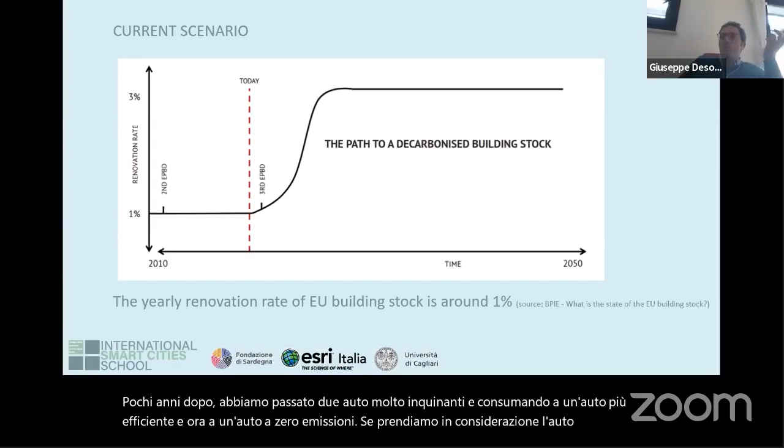It must be said now that working on buildings is very difficult compared to working in other sectors. For example, if we think of the improvements in the car market, it is evident that in few years, few decades, we passed from very polluting and consuming cars to more efficient cars, and now to zero emission cars, if we take into account electric cars. But it's an industrial world, and these industrial schemes are not easy to replicate in the buildings sector.

Another terrific data point is that of this 1% of yearly renovation works, only 5% of that 1%, a very, very small percentage, deals with deep energy renovations. Another fact that is emerging is that we are working on buildings in a very light way. We're not able to implement strong renovation interventions, deep renovation interventions, that are the most effective.

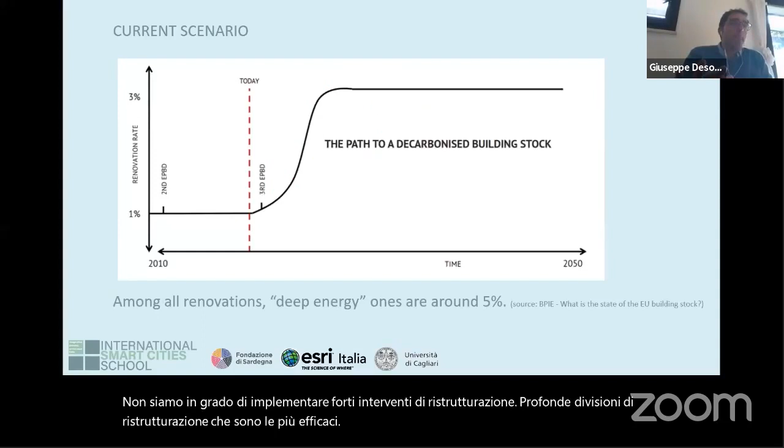Let me give you a quick classification on how we work on buildings at the moment regarding renovation works. The first step is what I call crypto technologies, from Greek, crypto meaning hidden. There is a large share of the market occupied by technologies that make their invisibility a point of strength.

Unluckily, this is also supported by some designers who try to implement energy performance without working on the morphological aspect of the buildings. So there is a tendency to maintain the building as it is and try to apply technologies that improve energy efficiency without modifying the building. It is not possible. It is a share of the market generally occupied by the most ineffective technologies.

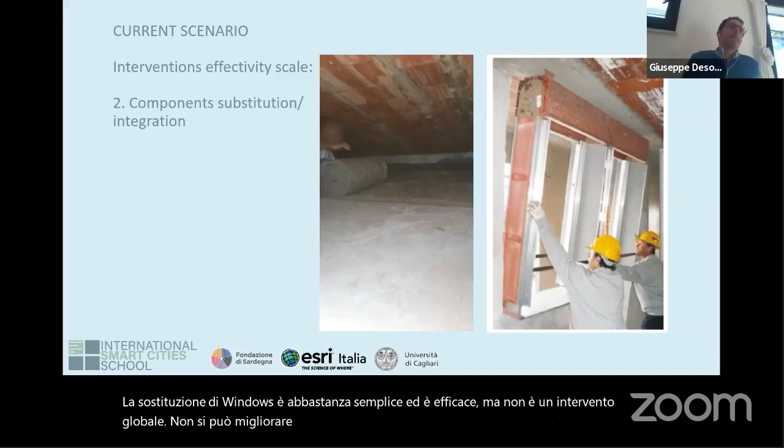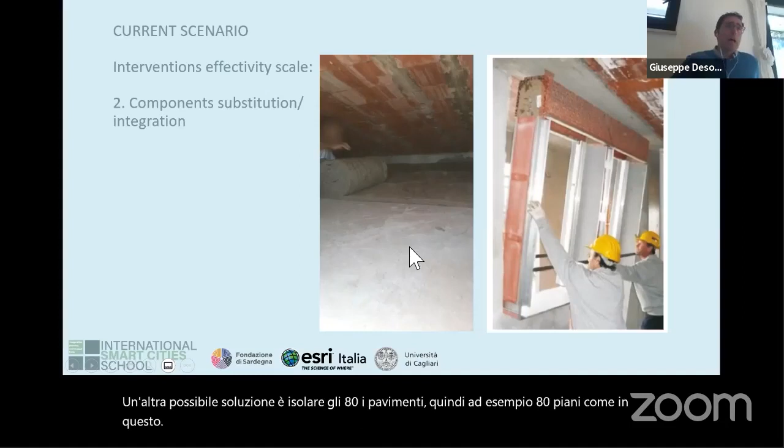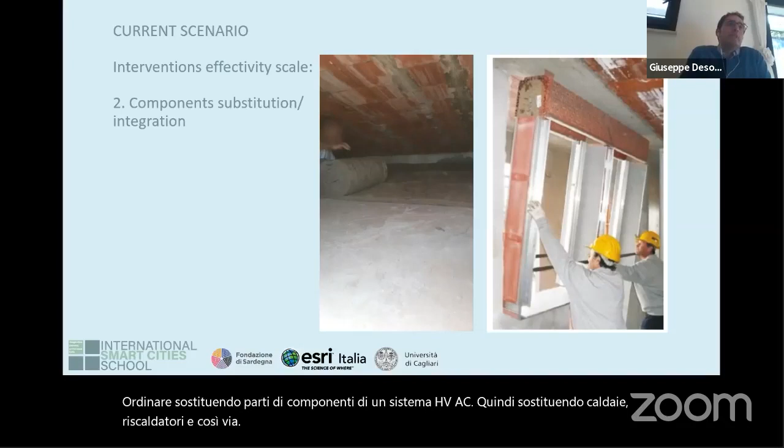Other possible solutions are insulating the floors, for example attic floors, as in these pictures, or substituting components, parts of HVAC systems, so substituting boilers, heaters, and so on. It is the second step, not so performing, but at the moment the most pursued in Italy, but also at the European level.

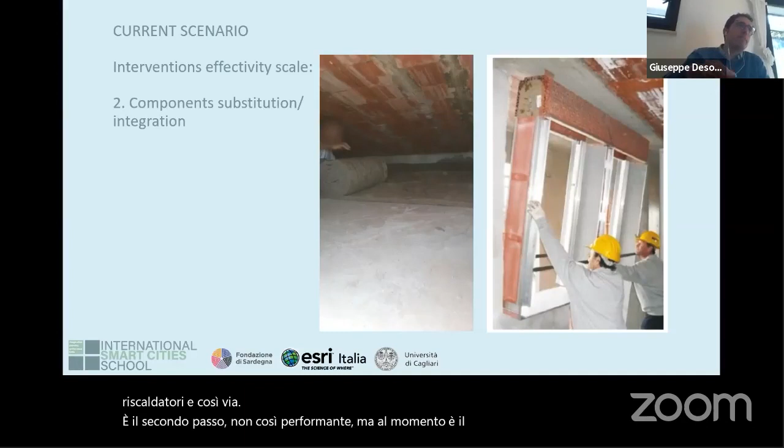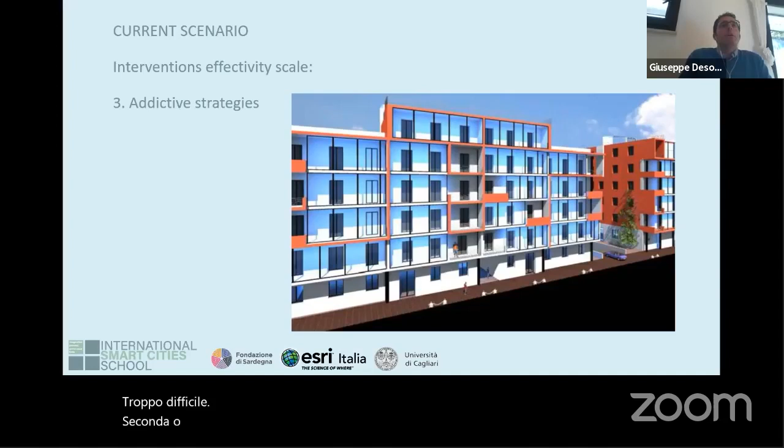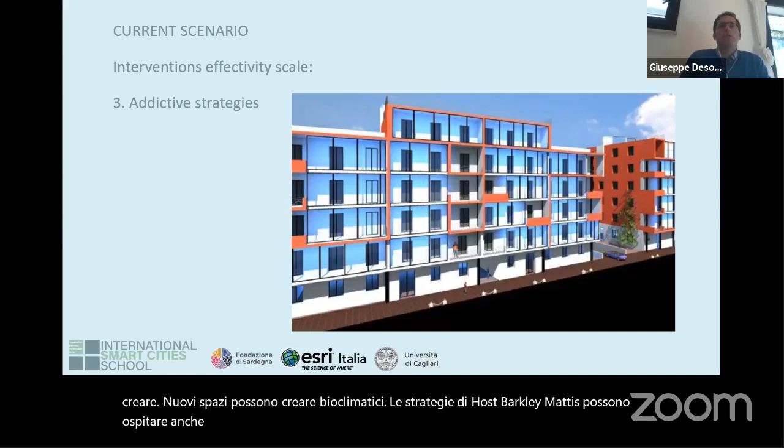A third step is very interesting. It is quite innovative and deals with additive strategies, the strategy of adding a second or a third skin to the buildings that can improve in an important way the energy performance of the building. These additions can create new spaces, can host bioclimatic strategies, and can also host renewable energy devices or efficient energy systems. There is some research at the moment at the European level for these strategies. I think they will be quite promising in the future.

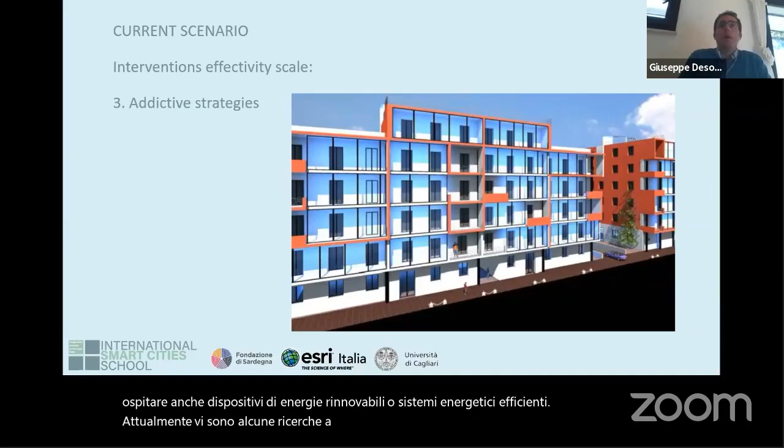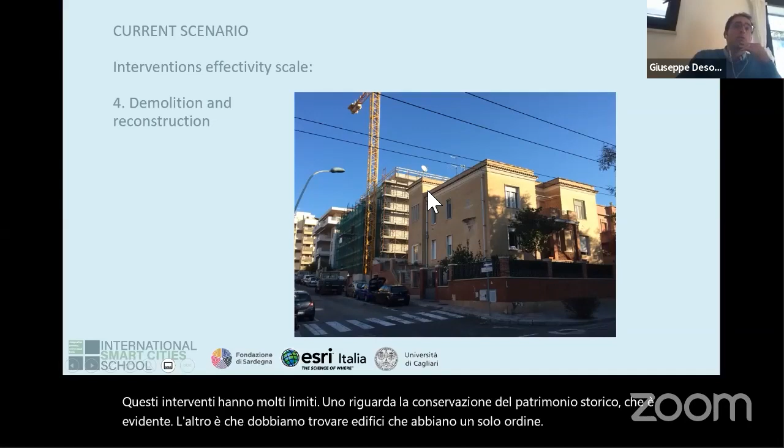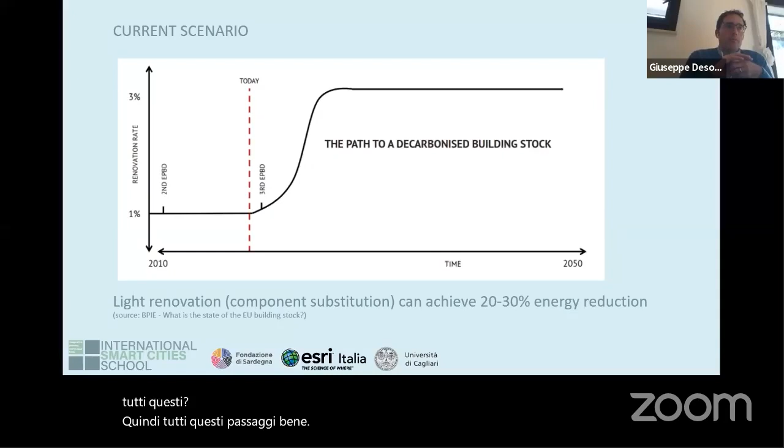These interventions have a lot of limitations. One regards the preservation of historical heritage, which is evident. The other is that we have to find buildings with only one owner, because, as we will see in the next slides, when we have co-owned buildings, everything becomes more difficult. So in terms of energy savings and energy efficiency, what are the differences among all these steps? Well, light renovation, for example component substitution, can achieve a maximum 20-30% energy reduction.

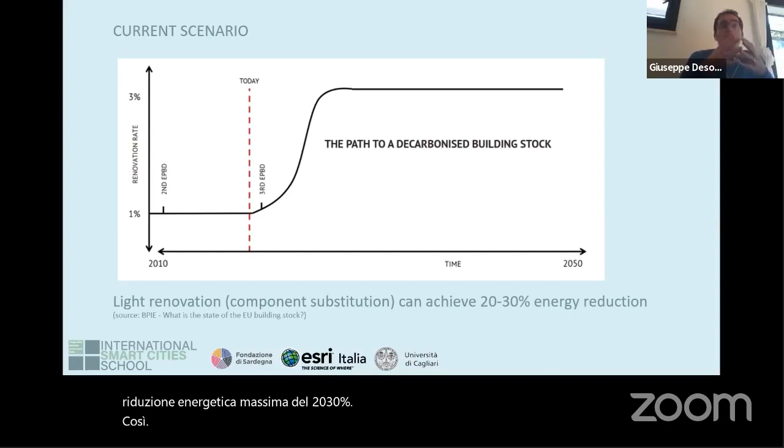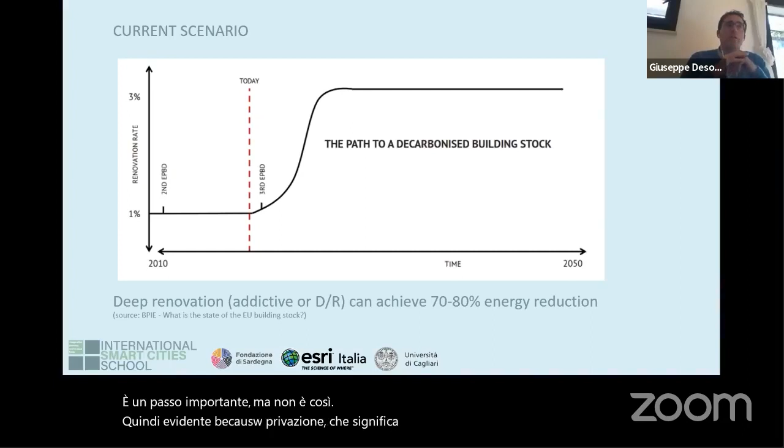So it's an important step, but not so evident, because deep renovation means additive interventions or demolition and reconstruction. This can achieve 70-80% of energy reduction compared to the current status of the buildings. So it is evident that the European Commission is trying to push this kind of intervention—additive interventions, demolition and reconstruction, or substitution of a large part or nearly all building components.

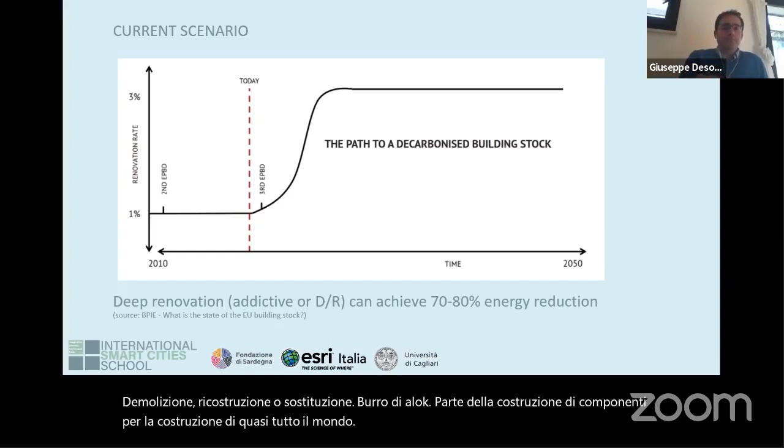Trying to reach these goals, which are the key principles in this new document of the European Commission? Well, the most important is the first: energy efficiency first. Only produce the energy we need. We know that working only on energy production is easier—working on renewable energies is easier than working on energy efficiency of final uses—but it is not sufficient. It is nowadays demonstrated that it's not possible to supply actual energy consumption only with efficient production technologies, like renewable. So we have to work on consumption, on the efficiency of final uses, in this case buildings. It is the most difficult thing to do, but we cannot skip it.

Affordability: sustainable buildings widely available. At the moment, let me say it in a very easy way—performing buildings are for rich people. Saving energy is a luxury at the moment, something that only those with money can afford, because efficient buildings cost more than poor performing buildings. It is evident. We can work on reducing the cost difference between traditional and innovative technologies, but they still cost more. It's also a question of cost distributed over the lifespan of the building. So we have to work on the global cost of the building, and those who can afford more investment now will benefit from lower expenditure in the future. We have to try to make this possibility available to most of the population.

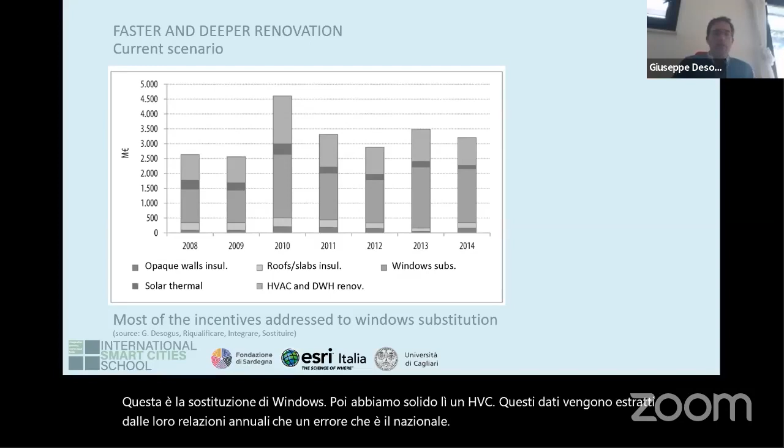These data are extracted from the annual report that ENEA, the Italian National Energy Agency, publishes every year.

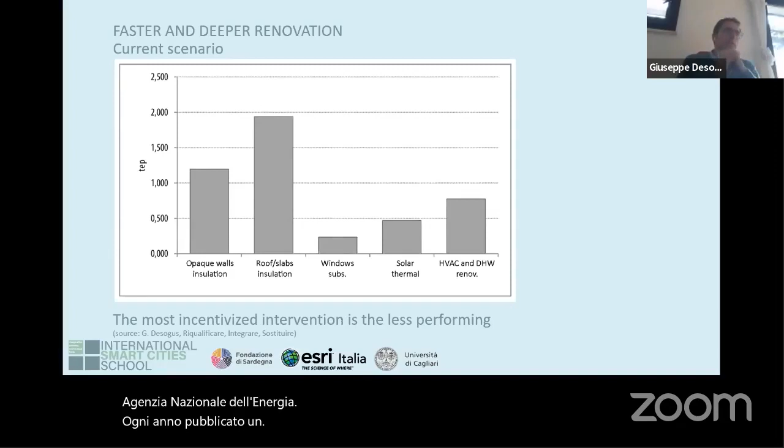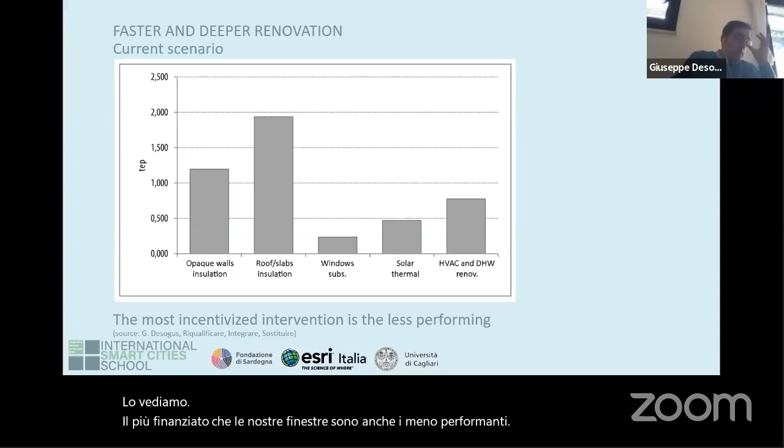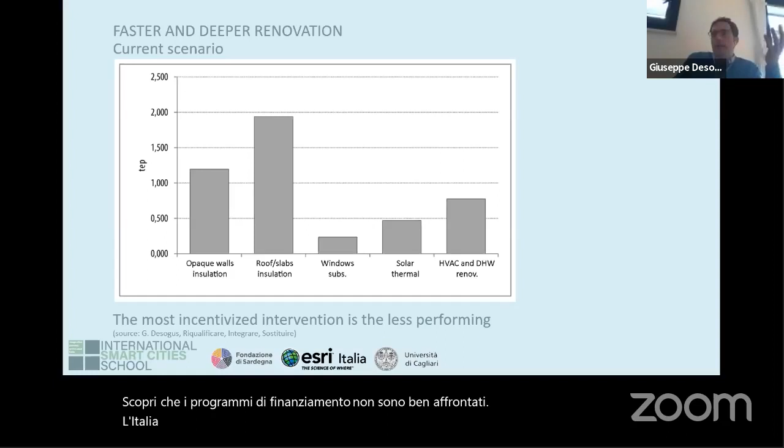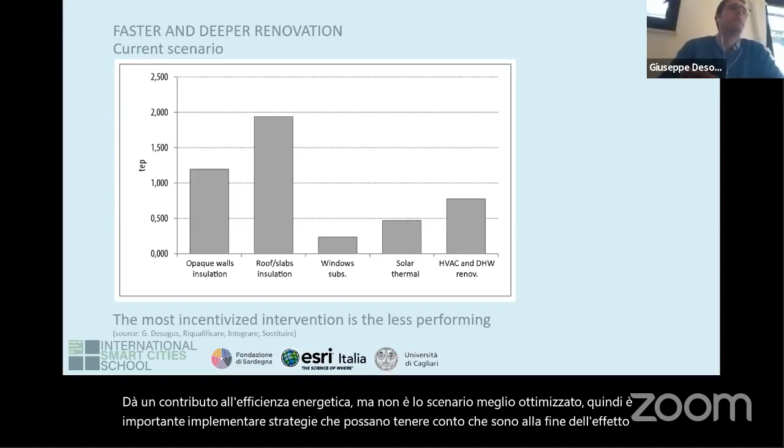If we analyze the energy saving in terms of tons equivalent of petrol according to the same data, we can see that the most financed interventions, which are windows, are also the less performing. So funding schemes are not well addressed. Italy is spending money mainly on substituting private building windows. It gives a contribution to energy efficiency, but it's not the best, the optimized scenario. So it is important to implement strategies that take into account the overall effect of these financial incentives.

Another issue important to consider when we talk about buildings can be summed up by this statement of Lord Kelvin, one of the fathers of classical thermodynamics. He said: if you cannot measure it, you cannot improve it. The question I always ask is, are we sure that we are able to measure buildings? Do we really know our buildings? According to my experience, the answer most of the time is no.

There are two categories of information that are difficult to understand about buildings, in my opinion. The first, which seems very basic but believe me it's not easy, is how the building is built. We really don't know the technologies used to build a building, especially a private building. Public buildings can be better known, but for existing private buildings it's very difficult to identify which kind of walls, which kind of materials for walls, slabs, roofs and so on have been used, because most of the time we don't have a design.

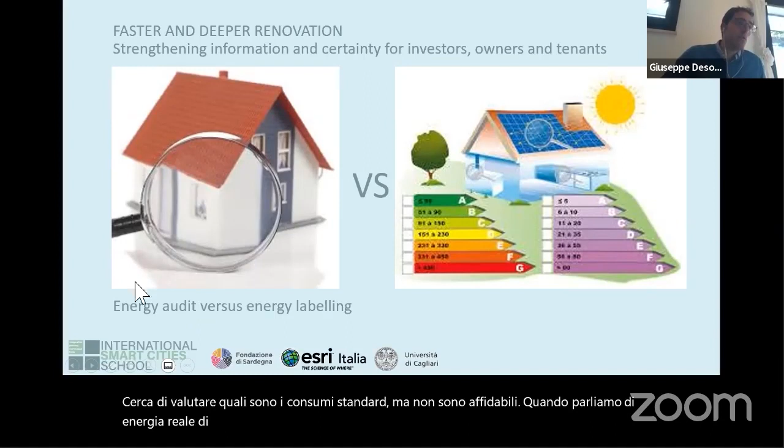So there is quite a big difference between energy audit and energy labeling. Energy labeling can only be used to compare different buildings and to assess their standard consumption, but it's not reliable when we talk about real energy consumption. Energy audit is what we actually need to do on buildings.

Working on big buildings like hospitals, schools, commercial buildings, big public buildings, an energy audit is cost effective. But making an energy audit on small residential buildings, sometimes only on one flat, it's not cost effective, because it needs very expensive and invasive diagnostic technologies that are not compensated by the return, excuse me.

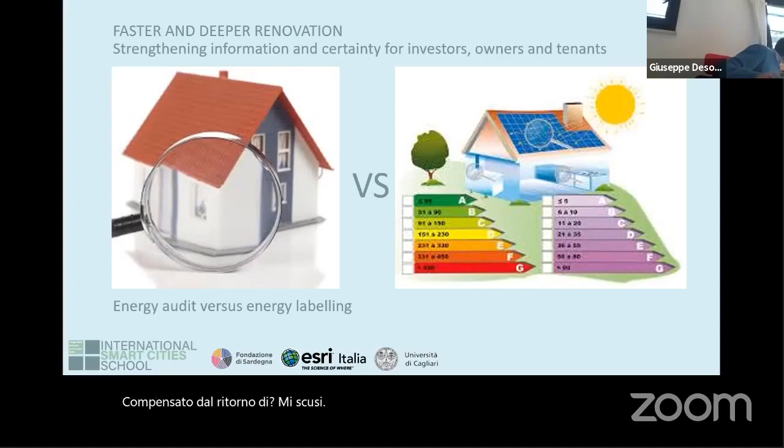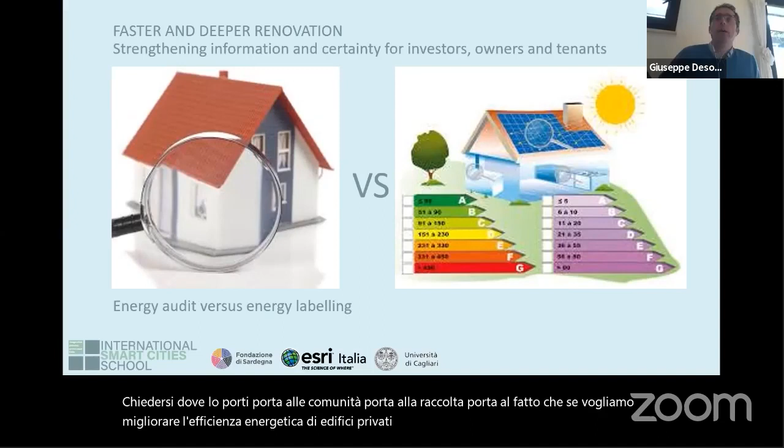Where it brings communities together, it brings gathering, it brings to the fact that if we want to improve energy efficiency of widespread private and residential buildings, we have to gather together and try to implement technology or procedures like energy audits, whose costs can be distributed over a lot of users.

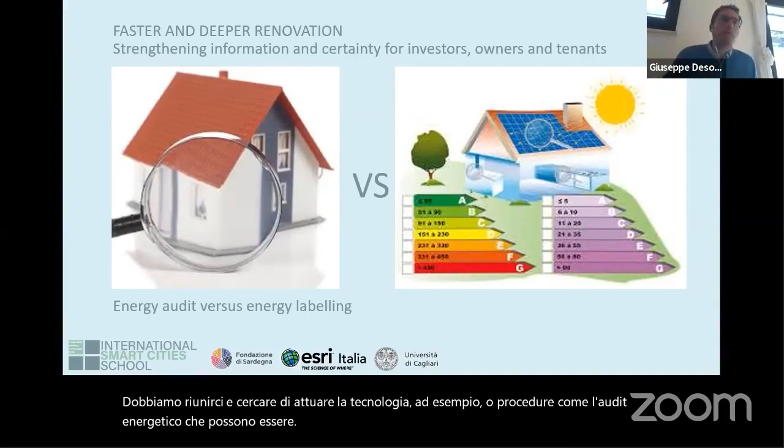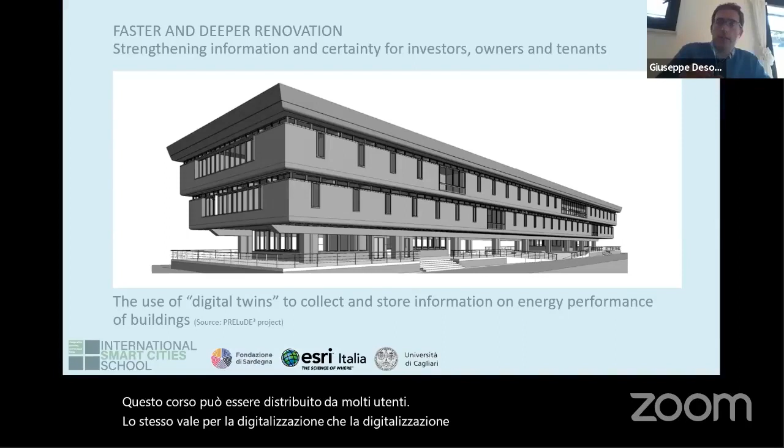The same is true about digitalization. Digitalization can help to make reliable energy audits. But for example, BIM procedures, building information modeling procedures, are again expensive, so it is not possible to use them just for one small home or flat or house.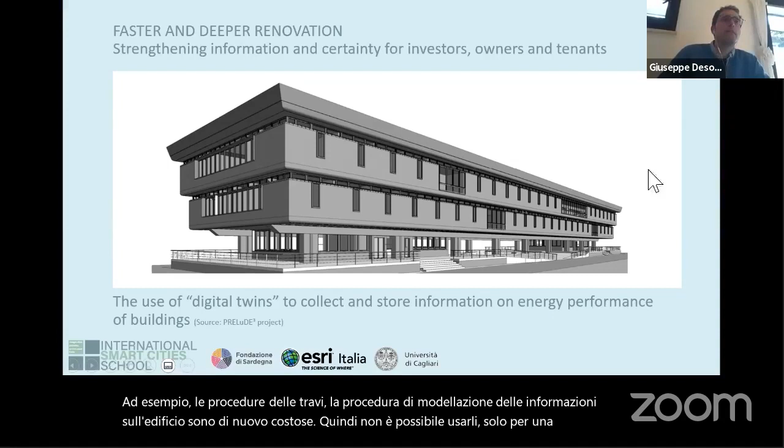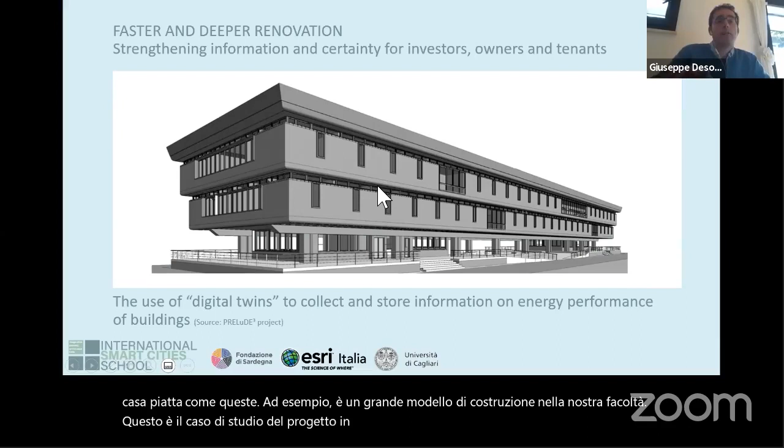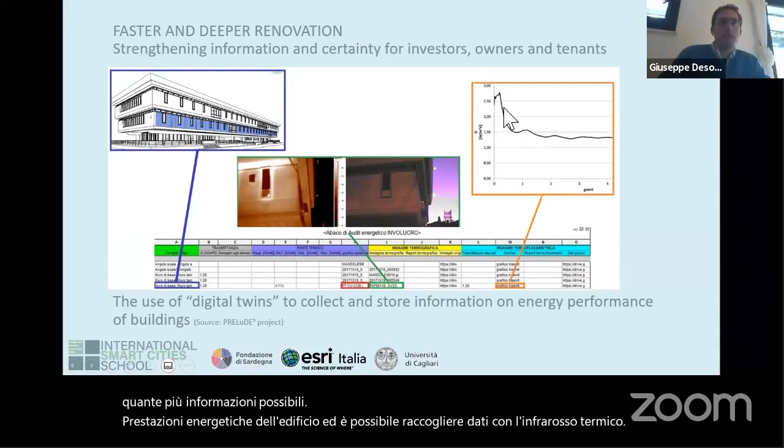This, for example, is a BIM model of a building in our faculty that is the case study of a project called Prelude. We're trying to use building information modeling to collect as much information as possible regarding the energy performance of a building. It is possible to collect data with infrared thermography, with heat flux meter measurements, and also it's possible to connect sensors, so building automation, with building information modeling of the building. But it cannot be done for a single flat.

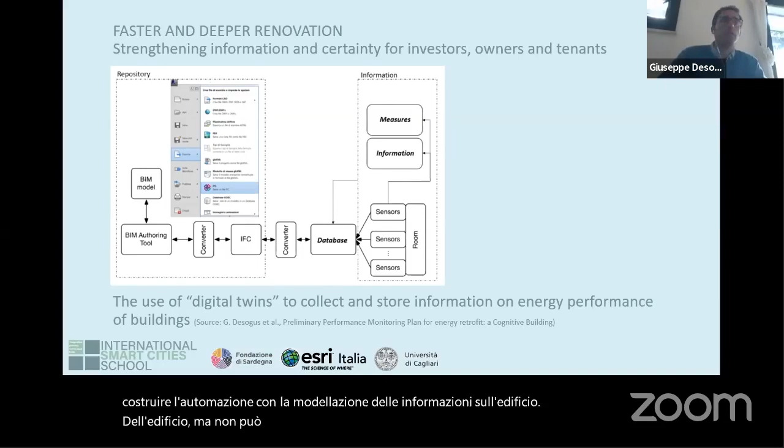So it is important to create, as we will say in the following, energy efficiency communities.

Give me just one second again. I hope this is the last interruption. Okay.

Knowledge. Then let's try to find an instrument to improve renovation. Well, renovation has a cost, sometimes it's quite expensive. How can we help people sustain the cost?

Well, the first scheme, the first idea that came up at European level was to implement what is called third-party financing. So involve a third party that is not the owner or the final user of the building, but someone, a company, maybe a bank, that is interested in investing in energy efficiency. The basic assumption on which third-party financing works is that consumption before is higher than consumption afterwards, so there is a real energy reduction.

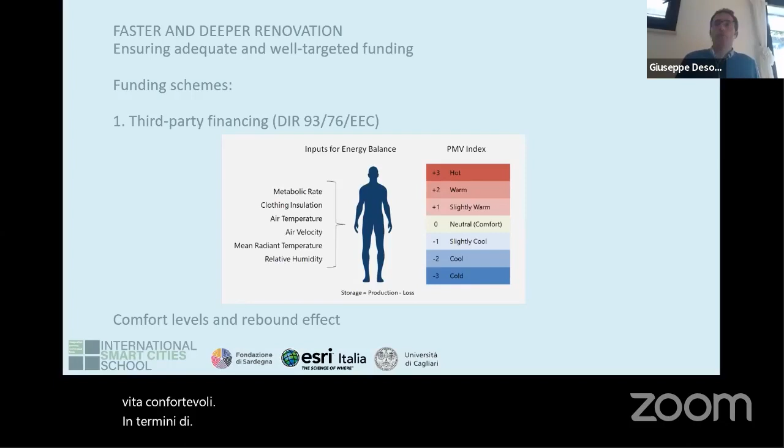On buildings, we use energy for what? We use energy for giving people comfortable conditions of life in terms of thermal condition, visual condition, acoustic condition, quality of air, and so on.

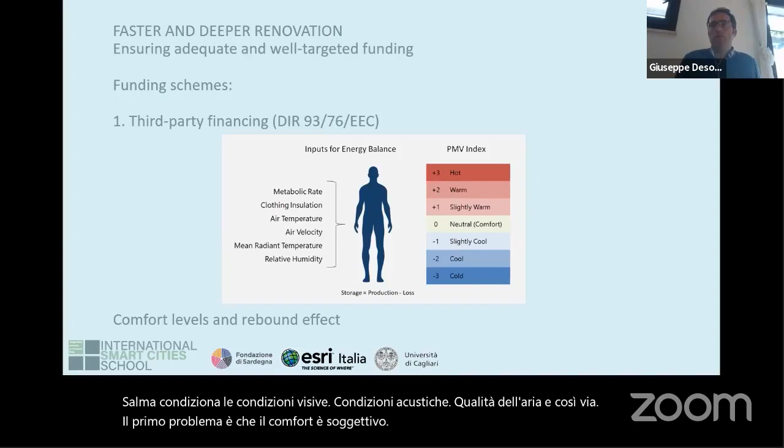The first issue is that comfort is subjective. We can talk about comfort only on a statistical basis. So involving a lot of interventions and a lot of people, we have the possibility to be statistically sure of comfort improvement, for example. But at single building level, it's not easy to understand if comfort is perceived, because it depends on a few people, and the perception of thermal condition, for example, is different from person to person.

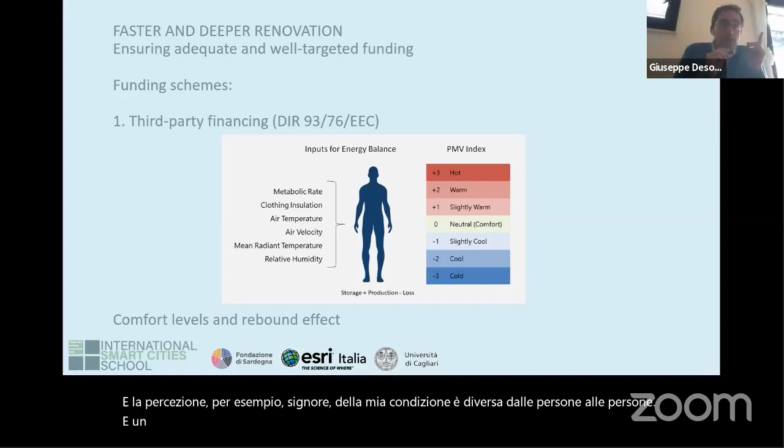Another important aspect is that if comfort is not met before the works, the first result of the works will be reaching comfort condition, not consuming less energy. Because if people can afford to have comfort conditions, they will tend to spend the same amount of money and energy, but just to improve their condition.

It is good because we're talking about fuel poverty, about low-income people generally, who can now afford to heat or cool the building sufficiently, and that's a good thing. But who wants to invest in other people's comfort benefits? That's the point. Not private parties. Public, yes, but not private.

So when we talk about third-party financing, and we're talking about energy service companies, take into account that if this procedure, this mechanism, is not supplied by public subsidies, it doesn't work.

And then we have the necessity of public incentives. Generally, there are two kinds of incentives, diffused more or less in every European country: on-bill incentives, generally for public bodies, where the government gives cash back to public bodies that invested in energy efficiency; and on-tax incentives, generally for private owners or tenants.

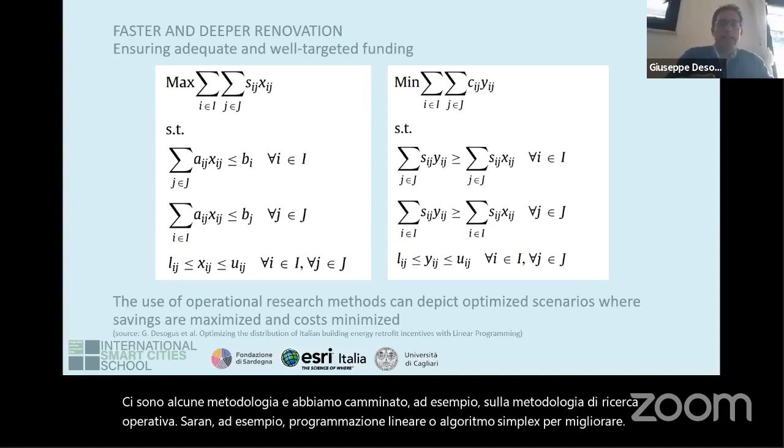There are some methodologies, and we worked, for example, on operational research methodologies, such as linear programming or the simplex algorithm, to improve the incentive scenarios. So incentives cannot be dedicated just to single technologies, but we have to optimize the mixture of technologies, which depends, for example, on geographic and climatic conditions, to reach the best scenarios.

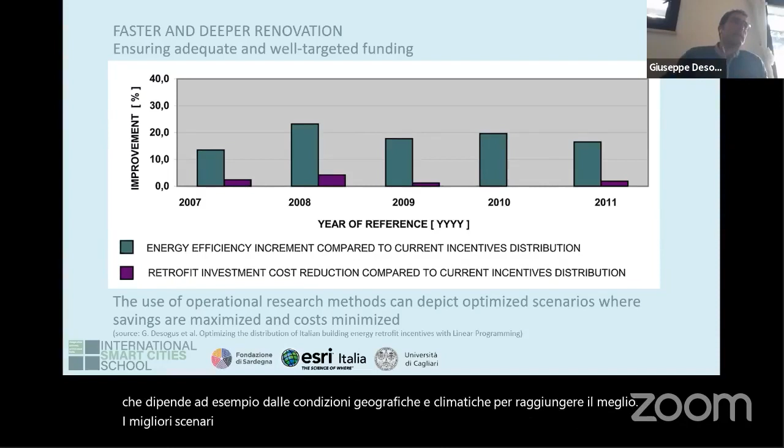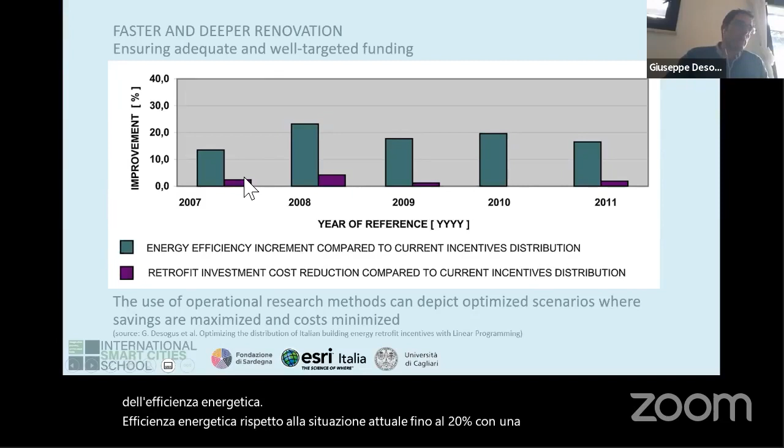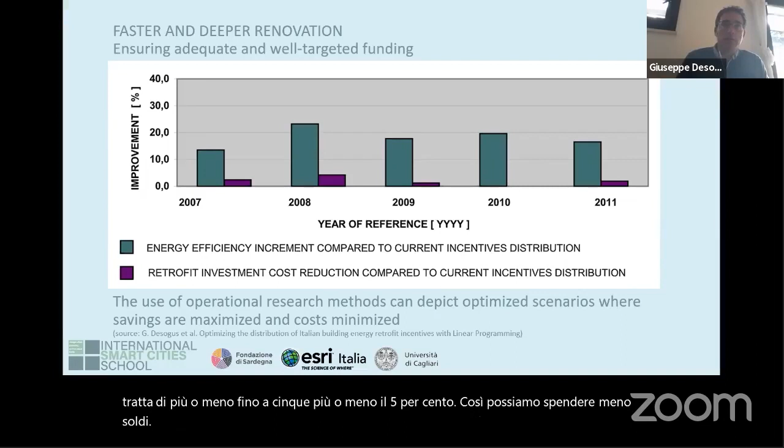We demonstrated, for example, that there can be an increment in energy efficiency compared to the current situation of up to 20%, with a reduction of cost of about 5%. So we can spend less money by pushing those technologies, or that mixture of technologies, that are most effective.

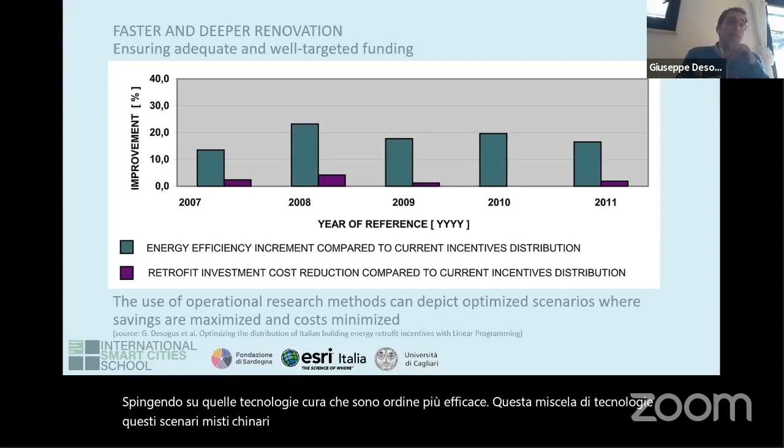This is something that public government should do at the European member state level. It's not easy, but it must be done.

The other problem with on-tax financing is that it's not able to avoid fuel poverty. Low-income people have no money to heat buildings, so they have no money to invest in energy improvement. It's evident, so they must be supplied differently; the government should find a different way to address this target of people.

Another problem is the diffusion, in some EU members especially Spain and Italy, of co-owned buildings, blocks of flats divided into many units. Every owner owns his own flat, a first-class property, and then a share of all the common parts of the building, which are shared by all owners. Let's say that's a B-level property.

But this B-level property, which people don't consider important, includes the technological parts in charge of energy efficiency: facades, roofs. They are common parts, and they are the most important parts of the envelope in terms of energy efficiency.

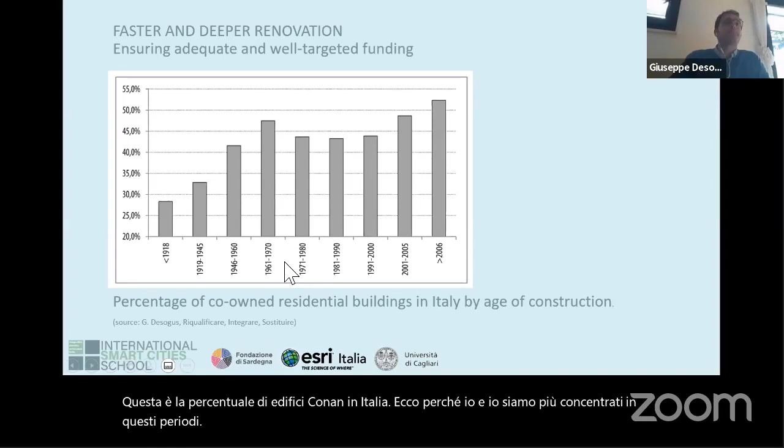It is quite high, most concentrated in the period just after the Second World War, when in Italy there was an urgent need for reconstruction that led to building a lot of multi-property buildings.

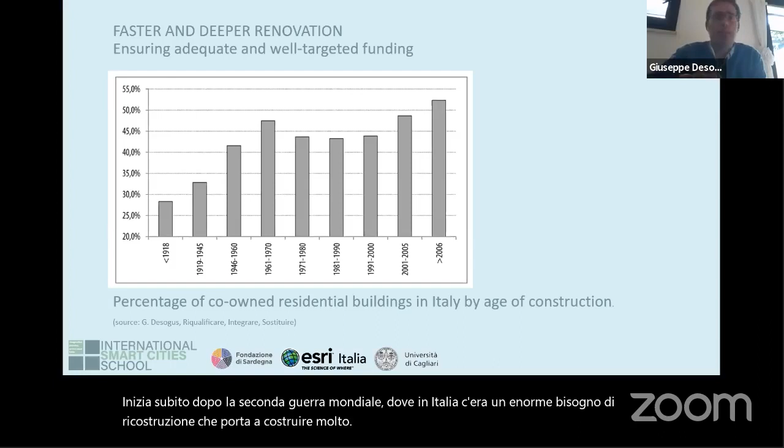So Italy is trying to go beyond the limits imposed by co-owned buildings by increasing the financed quota of intervention up to 110%. They're trying to say: if I give you more money than you invest, maybe intervention on the common parts becomes more interesting.

The other possibility is to transfer the tax credit to a third party, mixing a third-party scheme with a publicly financed scheme—so I have no money to invest, but I can give my tax credit to a third investor. It's very new, it started a few months ago. We will see if it's a good solution or not.

The last issue, also recalled in the European document, is the participatory and neighborhood-based approach, communities. But the European document talks only about energy communities. In my opinion, energy communities are not enough.

If energy communities are only producing, selling, and buying energy for a group of people at a convenient price, they will not contribute to improving energy efficiency of buildings, and above all—this is the first and important issue—to manage and preserve long-term efficiency.

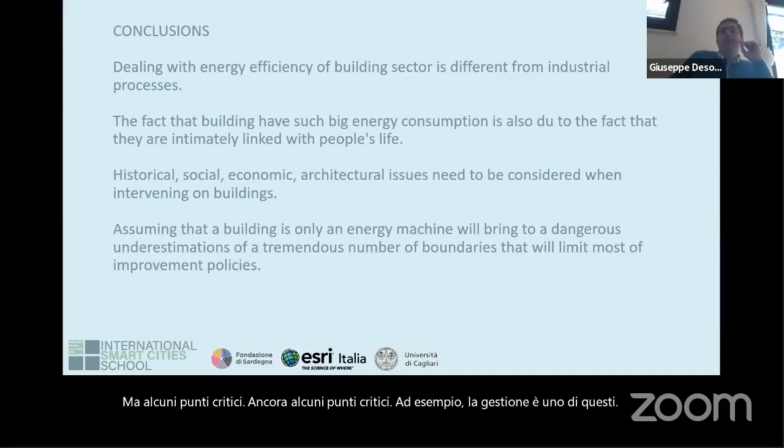But it has some critical points still. For example, management is one of these. The conclusion is that when we talk about energy efficiency of buildings, the issue is very complicated.

Buildings are strongly related to people's life. Buildings are the place where we spend most of our time. They can be workplaces or houses, it's not important. Working on them, we need to take into account that they cannot be seen only as energy machines.

So devices that have energy as input and then maybe comfort condition as output, or they transform energy in another way that is wasted—well, actually, it doesn't work that way. We need to think that working on buildings has a lot of boundaries that are technological boundaries. It's okay, but there are also economic boundaries.

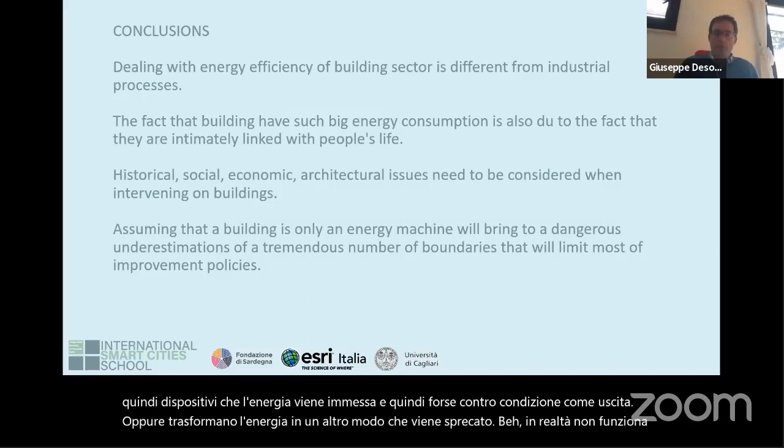So, for example, we have to work with people that have no money. No one gives money, no banks give money to a sector that has no money to invest in energy efficiency, if it's not productive.

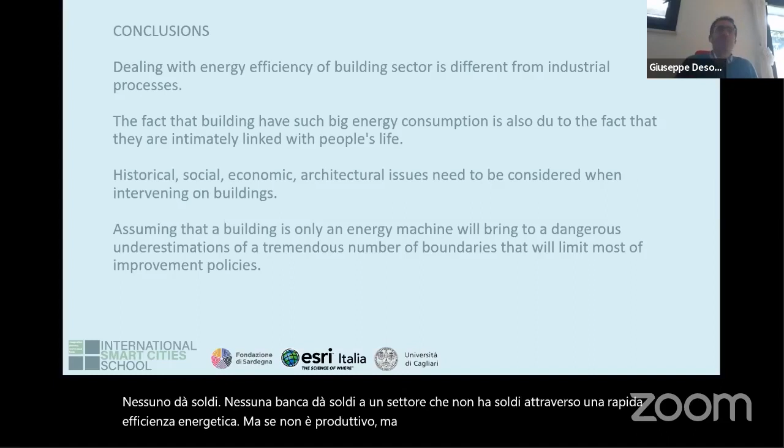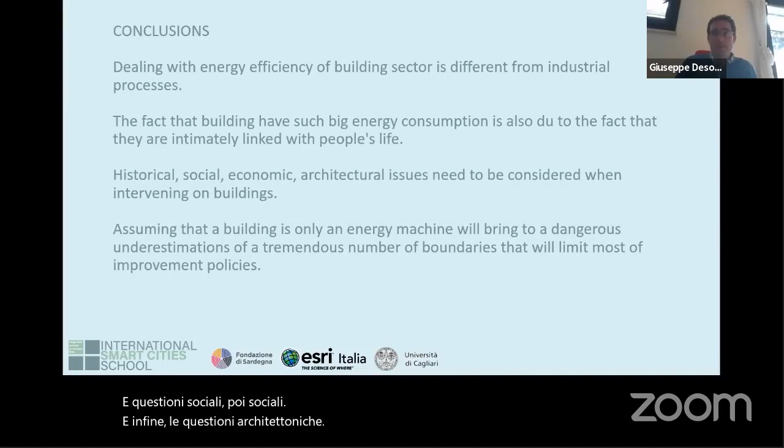But we have to do this with low-income people, and social issues, and finally architectural issues that, in my opinion, are one of the most expected.

Buildings were built according to some rules, some technologies that were representative of the state of the art at the moment when they were built. We cannot skip it. We cannot pretend not to take them into account. They're fundamental, especially when I work on historical buildings that are historical witnesses.

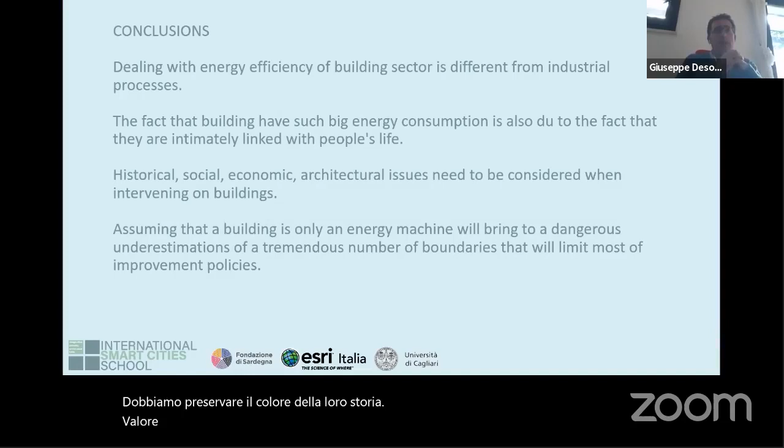So we have to preserve the historical value. It's various and quite complicated. I hope I gave you an overview of these issues.

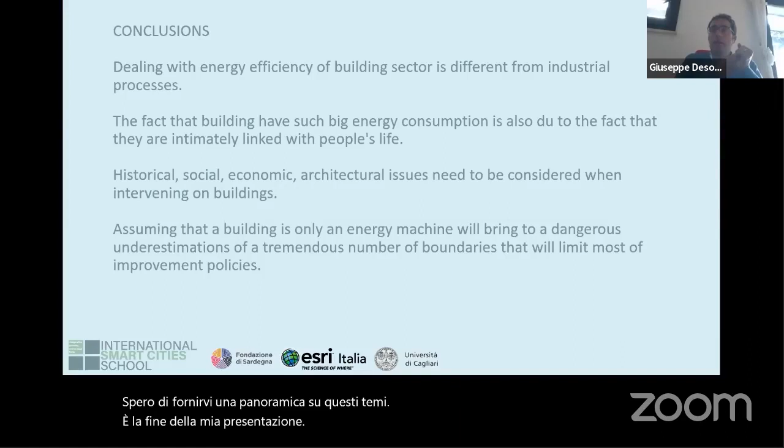Okay, thank you. Are there any questions? Thank you, Luigi. Are there any questions? There are some comments—comments, questions, or requests. Not just thanks, but question or comment. There are a lot of thanks. Critics, please don't critic my English at the moment.

I need practice, really. My God, I understand, I'm always rusted. I always need practice. I don't want to speak. Not only you. I just speak with my dog, but she has some German Shepherd blood in her veins, so I think she's not very interested in speaking English.

Is it possible to implement an energy model at district scale in a GIS environment? Yes, you will see tomorrow a presentation from Stefano Pili on this. The issue of collecting information about energy performance of buildings or building features can be addressed with GIS. Yes, it's possible and very useful. Going down in scale, we can compare BIM, building information modeling, to GIS, but at the scale of a single building. The procedure and the aims are quite the same.